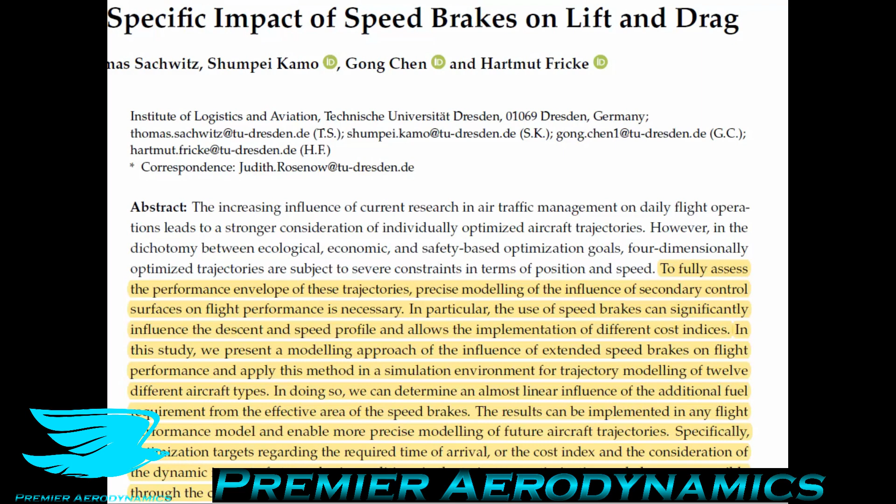So going on, in this study we present a modeling approach of the influence of extended speed brakes on flight performance and apply this method in a simulation environment for trajectory modeling of 12 different aircraft types. In doing so, we can determine an almost linear influence of the additional fuel requirement from the effective area of the speed brakes. So that's pretty cool.

It means that if you know what the area of your speed brake is, you can determine what the amount of fuel that you need is. And then they go on to say the result can be implemented in any flight performance model and enable more precise modeling of future aircraft trajectories.

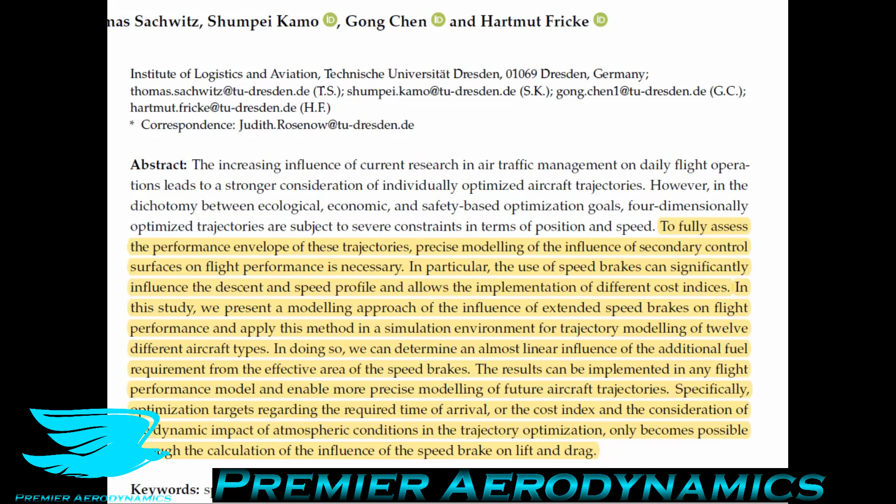Specifically, optimization targets regarding the required time of arrival or the cost index, or the consideration of the dynamic impact of atmospheric conditions in the trajectory optimization, only becomes possible through the calculation of the influence of the speed brake on lift and drag. So this is a very important sentence here, it says a lot.

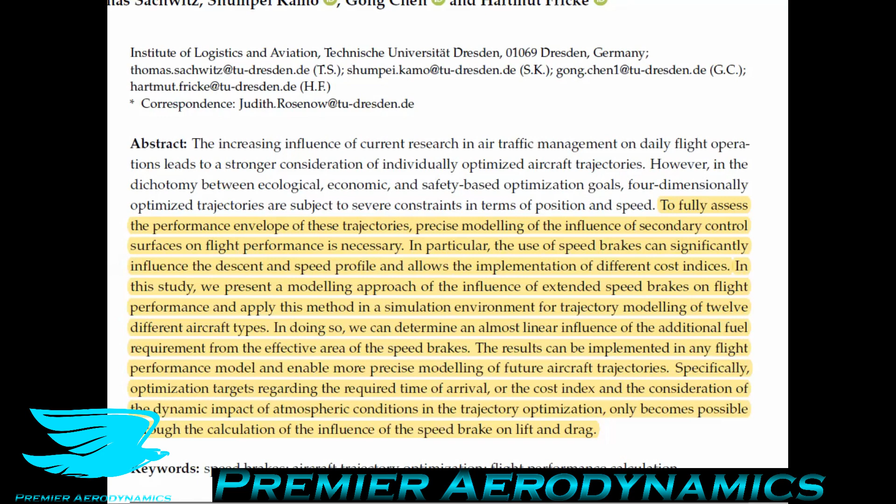What this is saying is you can calculate what the flight profile is based on all these different parameters, but if you don't factor in the speed brakes' effects on lift and drag, then it's not going to be accurate, and it's really not worth much in terms of the actual operation. So that's how much of an effect speed brakes do have on lift and drag of an aircraft and other aerodynamic characteristics, as we'll go into.

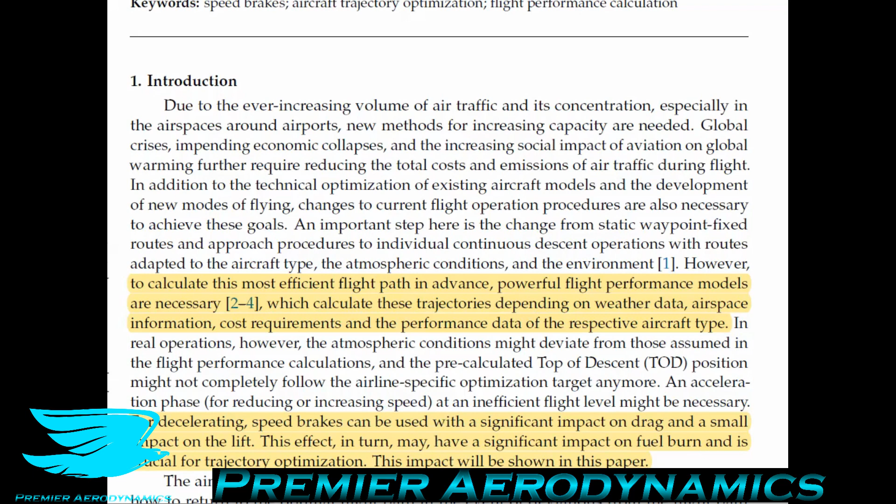So moving on, they say to calculate the most efficient flight path in advance, powerful flight performance models are necessary, which calculate these trajectories depending on weather data, airspace information, cost requirements, and the performance data of the respective aircraft type. So you can't just take off whenever you want to. You need to determine what the weather is, if there are any other planes around, whether you have enough fuel to reach wherever you're going, and the aerodynamic performance of an aircraft.

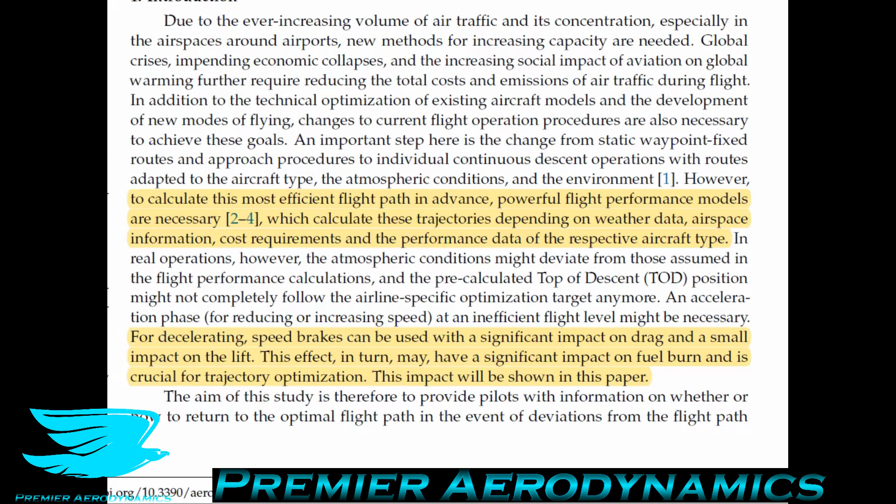So for decelerating, speed brakes can be used with a significant impact on drag and a small impact on lift. This effect, in turn, may have a significant impact on fuel burn and is crucial for trajectory optimization. This impact will be shown in this paper.

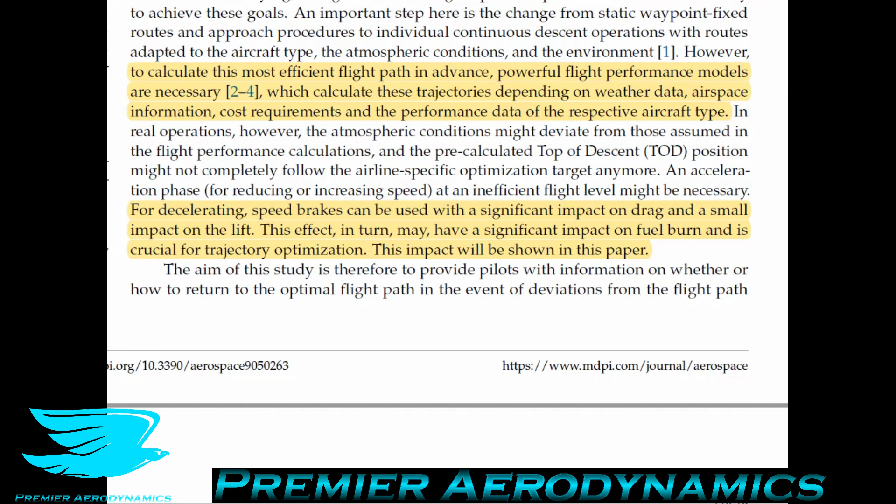So then they go through what we know about speed brakes to date. They say the impact of speed brakes on flight performance, i.e. on lift and drag, depends not only on the aircraft type-specific aerodynamic properties, but also on the speed and altitude of the aircraft. So there's quite a lot that it depends on. The impact of speed brakes is often not in the focus of relevant models, or is approximated by a constant factor of a change in drag of 0.02 and a change in lift of nothing.

This is what I was saying earlier, where if you, before - and this was very common actually before computers came around and before we knew much about aircraft in general - when you were designing an aircraft and let's say you wanted to put a speed brake on there, you would say, okay, well this will affect the drag by this much, in this case 0.02, and it'll affect the lift by nothing.

And this is just a standard that we use, but that's obviously not that accurate. And now that we do have computers and more information, we can get a much more accurate understanding of what the speed brakes do to lift and drag, and that way we can understand we don't need to have as big a safety factor when we're calculating flight envelopes and flight profiles.

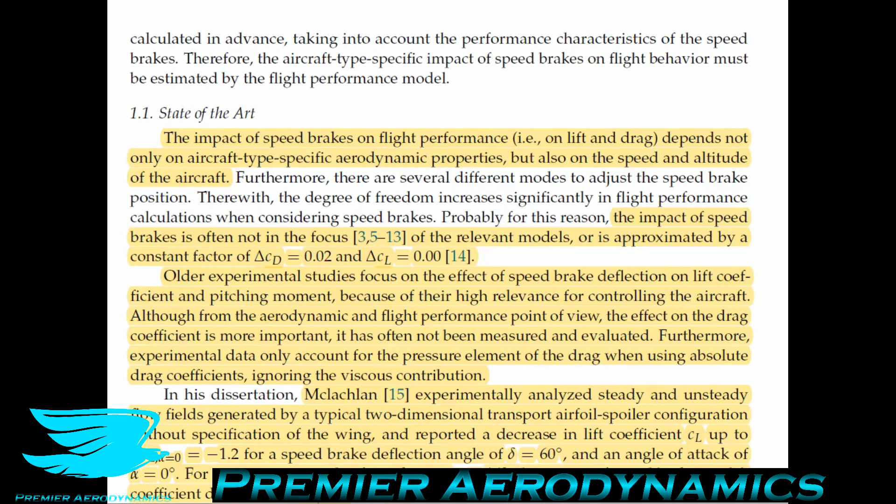So moving on, older experimental studies focus on the effect of speed brake deflection on lift coefficient and pitching moment. So the pitching moment is just, for those of you who don't know, it's whether the nose goes up or down, or the tail goes down or up.

Same thing. Because of the high relevance for controlling the aircraft, the pitching moment is very important for determining the lift. So if you want to increase the lift, you often nose up the aircraft. That then increases the angle of attack for the wings, and then you produce more lift.

Although from the aerodynamic and flight performance point of view, the effect on the drag coefficient is more important. It has often not been measured and evaluated.

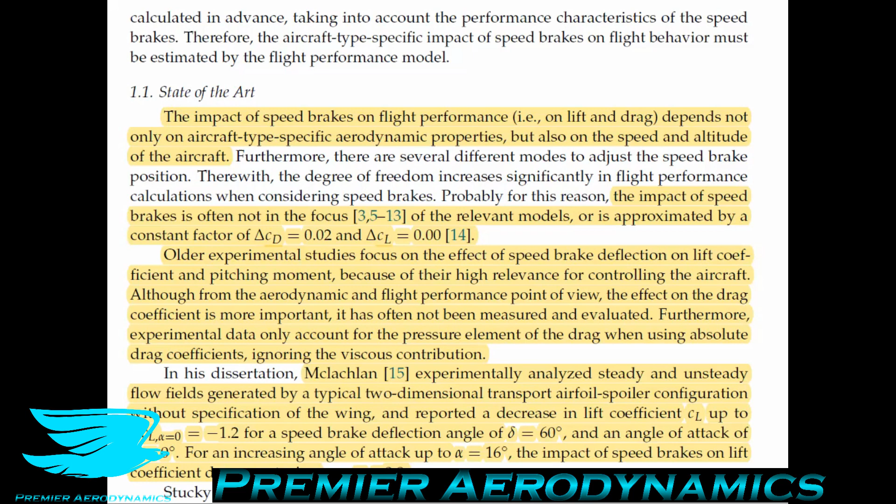Furthermore, experimental data only account for the pressure element of the drag when using absolute drag coefficients, ignoring the viscous contribution. So pressure drag accounts for quite a chunk of an airplane's drag, but viscous drag is actually quite important as well, particularly at low angles of attack. So around the 0-1 degree angle of attack, viscous drag can be 20-30%. And when you go to high angles of attack, then that's when pressure drag becomes far more dominant.

So moving on, Mclachlan experimentally analyzed steady and unsteady flow fields generated by a typical two-dimensional transport airfoil-spoiler configuration without specification of the wing, and reported a decrease in lift coefficient up to -1.2 for a speed brake deflection angle of 60 degrees.

And that's huge. So this was at an angle of attack of 0 degrees. If the speed brake deflection is 60 degrees, so the wing is at 0 but the speed brake has been popped up, you get a lift reduction of 1.2, way more than 0, which was the standard that most people used. And what's more, if you increase angle of attack up to 16 degrees, so the wing now is at 16 degrees, the impact of speed brakes on the lift coefficient decreases to -0.8. So that means that increasing the angle of attack reduces the effect of the speed brakes on the lift coefficient.

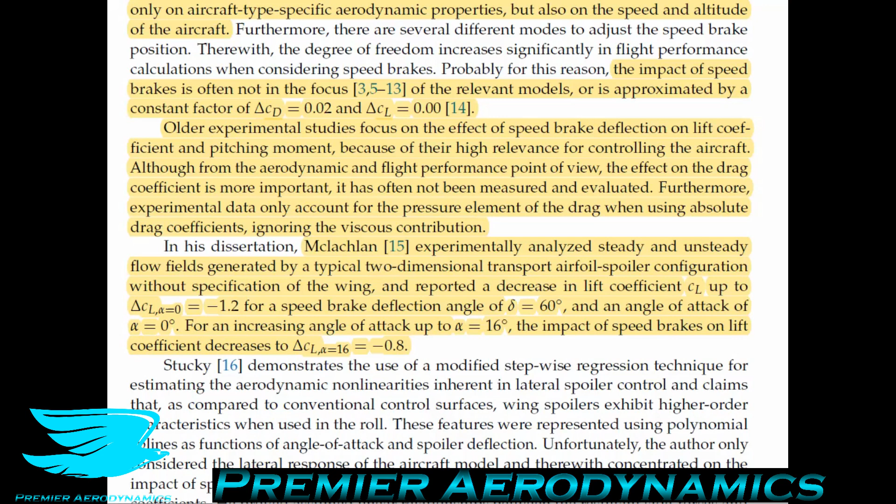Now, Abdelrahman and others experimentally studied the effects of spoiler configurations on the aircraft aerodynamics of a B747 airplane under wind shear conditions, and showed that spoiler deflection enhances the wind shear induced lift loss, especially at low angles of attack. They published experimentally gained values.

So for an angle of attack of 16 degrees and a deflection of 90 degrees on the speed brake, the lift coefficient increases by 1.25, corresponding to minus 70% of the lift at 16 degrees and a deflection of 0. And then if you have an angle of attack of 4 degrees and the deflection angle of 90 degrees, the change in the lift coefficient is 0.6. So it does change a lot.

Wind shear tends to amplify the spoiler effect on the side force and yawing moment, but only at a high angle of attack does it alter the resulting rolling moment. This shows the variability of these speed brakes depending on the orientation of the aircraft to begin with. Furthermore, Abdelrahman and colleagues proved that speed brake deflections have almost no influence on the aircraft stability margin.

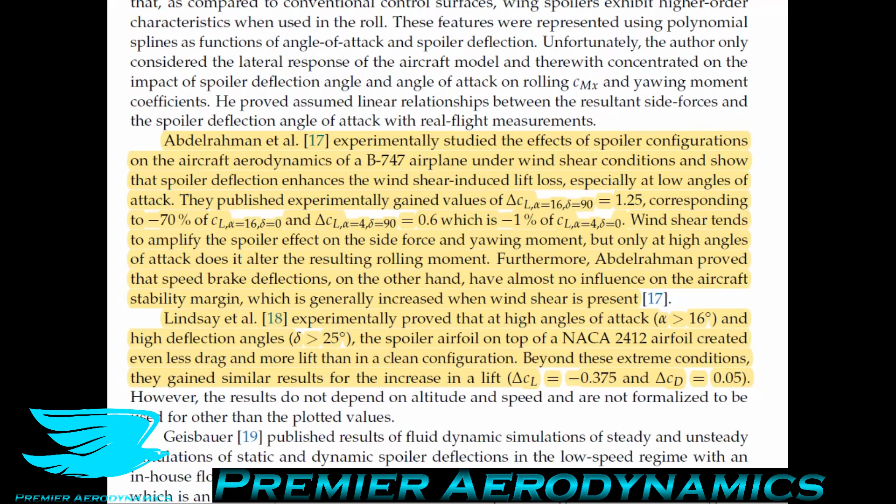Lindsay and colleagues experimentally proved that at high angles of attack, above 16 degrees, and high deflection angles above 25 degrees, the spoiler airfoil on top of a NACA 2412 airfoil created even less drag and more lift than in a clean configuration. So using a spoiler on this particular airfoil is actually better performance, you get less drag and more lift.

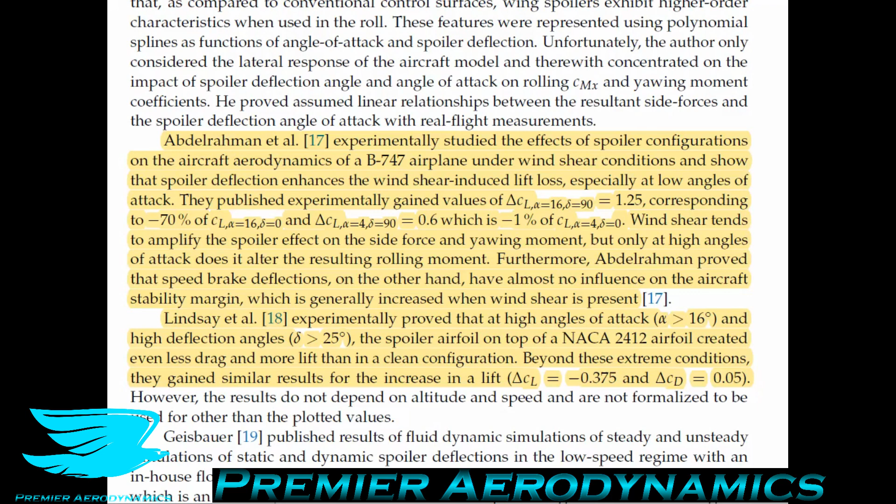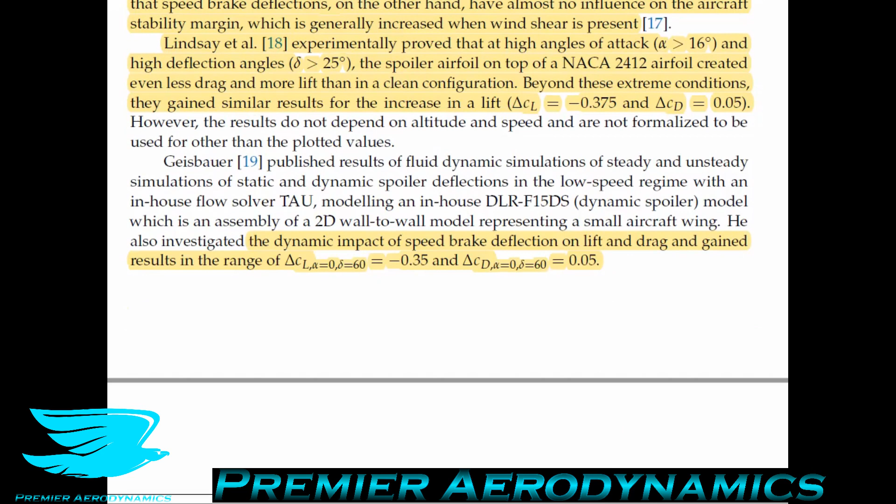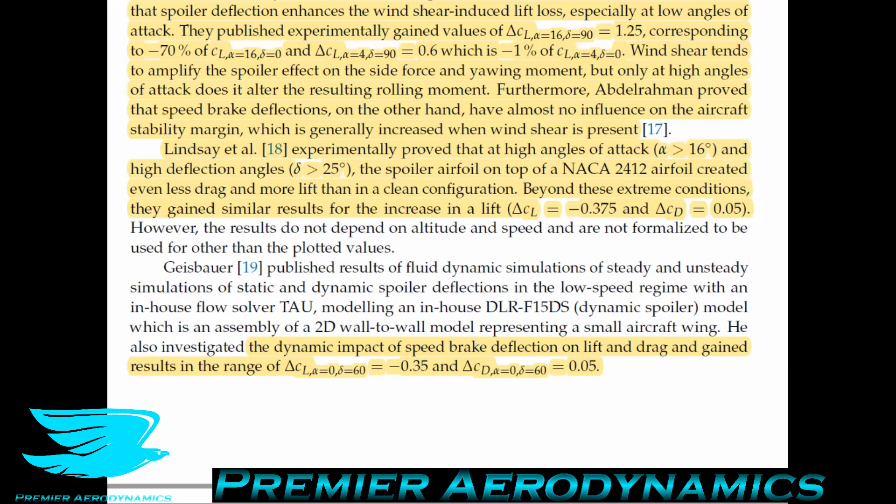Beyond these extreme conditions, they gain similar results for the increase in lift. The lift reduced by 0.375 and the drag increased by 0.05. The dynamic impact of speed brake deflection on lift and drag, in the range of a 0-degree angle of attack and deflection of 60 degrees, is fairly large, and again shows that speed brakes do affect the lift and drag of an aircraft a lot.

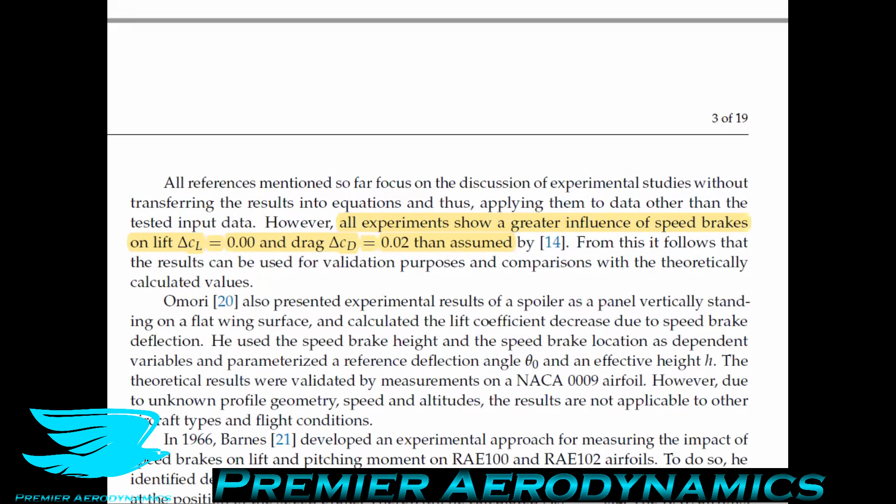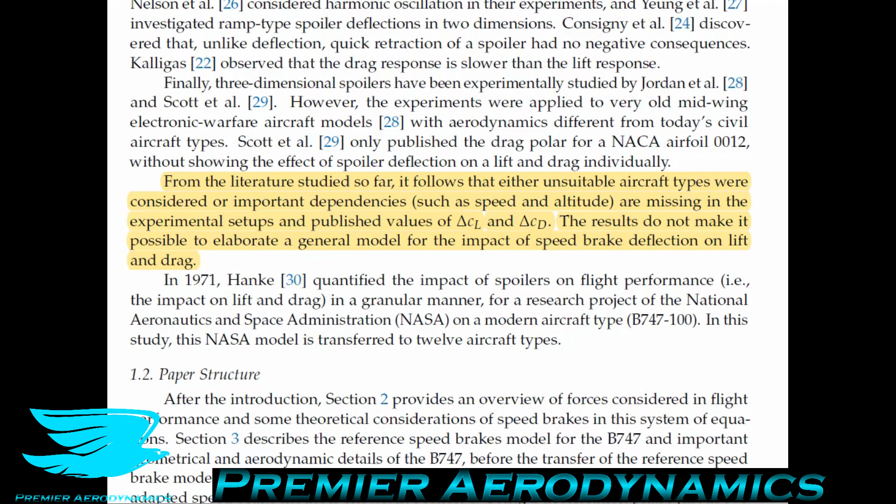All experiments show a greater influence of speed brakes on the lift coefficient and drag coefficient than assumed, 0 and 0.02 respectively, which is why they're doing this research. From the literature studied so far, it follows that either unsuitable aircraft types were considered, or important dependencies such as speed and altitude are missing in experimental setups and published values of the change in lift and drag coefficients. The results do not make it possible to elaborate a general model for the impact of speed brake deflection on lift and drag, and more research is needed.

They then go into their research and say that by using the speed brakes, steeper flight profiles can be flown without exceeding the speed limits of the aircraft type or the airspace currently being flown in. So let's talk about this. What does this mean? When you use speed brakes, why would you be able to have steeper flight profiles?

In a typical flight profile of an aircraft, let's break it down to very basic components. You have the takeoff and climb, then the cruise, then the descent and landing. The descent and landing takes a certain amount of distance to do. So when you're, let's say, 200 kilometers out from a city, you then start descending, and this is because of how quickly you can descend.

If you can use a speed brake, you can actually wait longer. Let's say you're only 150 kilometers out from the city instead of 200 before you start descending. That means you can travel faster, you can go through cruise for a longer distance, which means you get to the city quicker. That's why you can have a steeper flight profile, because you can descend quicker. That also means you don't have to travel as fast to get to your destination. You can travel slower, or the same speed, get there quicker, and ferry people back and forth between two destinations even quicker.

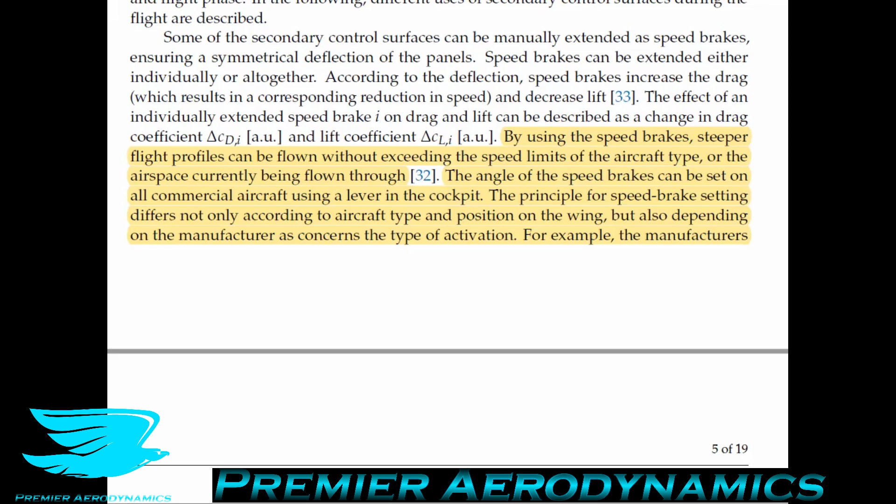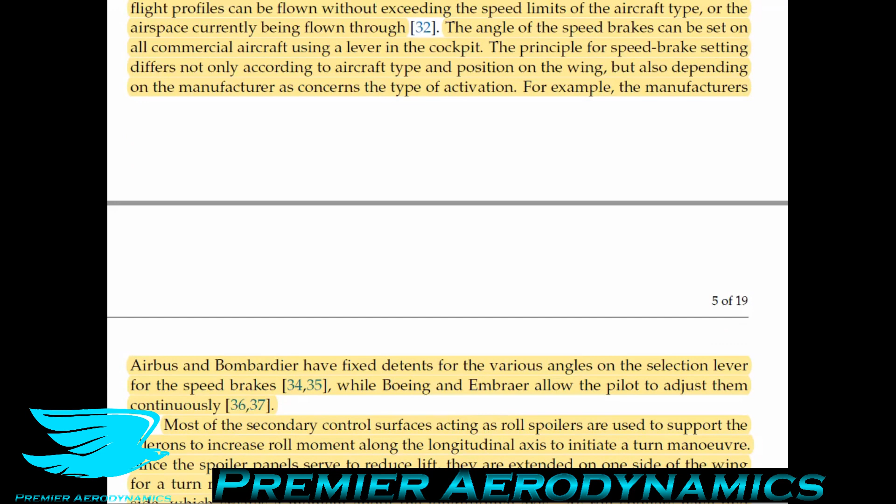The angle of the speed brakes can be set on all commercial aircraft using a lever in the cockpit. The principle for speed brake setting differs not only according to the aircraft type and position of the wing, but also depends on the manufacturer as concerns the type of activation. For example, the manufacturers of Airbus and Bombardier have fixed detents for the various angles of the selection lever of the speed brakes, while Boeing and Embraer allow the pilot to adjust them continuously.

Most of the secondary control surfaces act as rolling spoilers, used to support the ailerons to increase rolling moment along the longitudinal axis to initiate a turn maneuver. So let's talk about this. On an aircraft, you have a whole bunch of control surfaces: wing flaps, ailerons, and then these different types of air brakes, these speed brakes.

Ailerons are typically used further outboard on the wing, near the wing tips. The reason you put them so far out is because the further out you put them, the greater the moment arm is. You're rolling about the longitudinal axis, the middle of the aircraft, so if you go further out, that distance increases, which means you don't need as great a force to roll the aircraft, meaning you can get away with smaller control surfaces.

Now, using air brakes or these speed brakes, you can also use them to help roll. If you pop them up, that changes the lift on the wing, and then you can use them to also roll. So they help support this aileron function.

Since the spoiler panels serve to reduce lift, they are extended on one side of the wing for a turn maneuver. If you reduce the lift, that means the other side of the aircraft is producing more lift, and that's going to result in this imbalance in force, which results in a roll. The resulting asymmetric lift causes the wing to sink on one side, which creates a moment about the longitudinal axis.

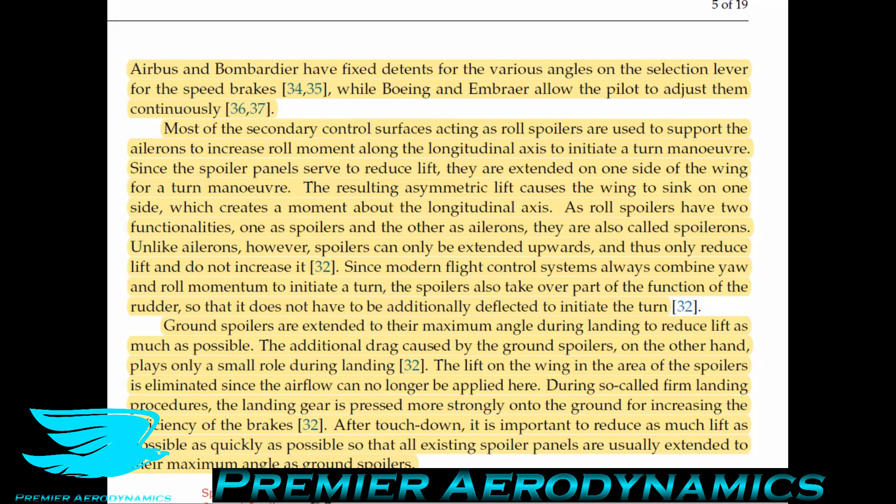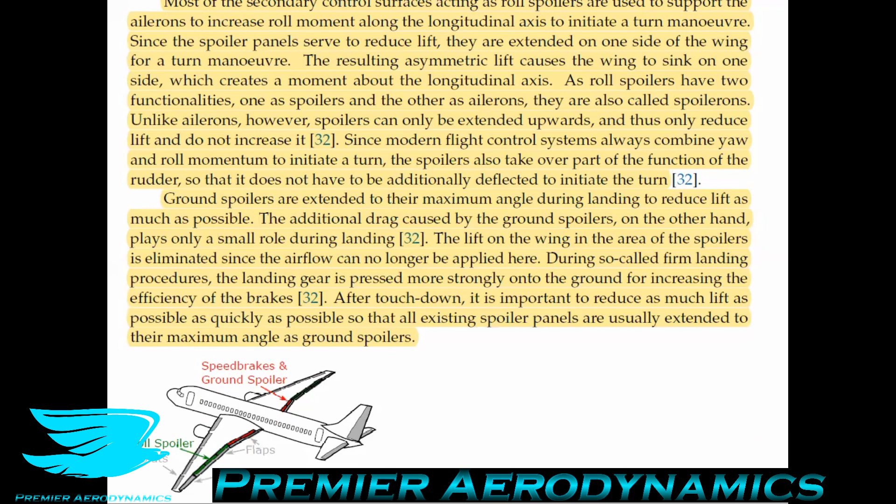On commercial aircraft, that's often not the case - you want them to be far more stable. So ground spoilers are different types of spoilers now. They're still on the wing, but have different functions. These ground spoilers are extended to their maximum angle during landing to reduce lift as much as possible. The additional drag caused by the ground spoilers, on the other hand, plays only a small role during landing.

This is very interesting because you typically assume when you see this massive air brake come up that this is increasing the drag, and that's the primary function - but the primary function is actually to reduce lift as much as possible. The reason why, as they explain, is that the lift on the wing in the area of the spoilers is eliminated since the airflow can no longer be applied.

During so-called firm landing procedures, the landing gear is pressed more strongly onto the ground to increase the efficiency of the brakes. This means that by dropping the lift so much, you can then rely on the brakes to arrest the aircraft instead of using aerodynamic drag. So this is one way of bringing the aircraft to a stop.

After touchdown, it is important to reduce as much lift as possible as quickly as possible, so all existing spoiler panels are usually extended to the maximum angle as ground spoilers.

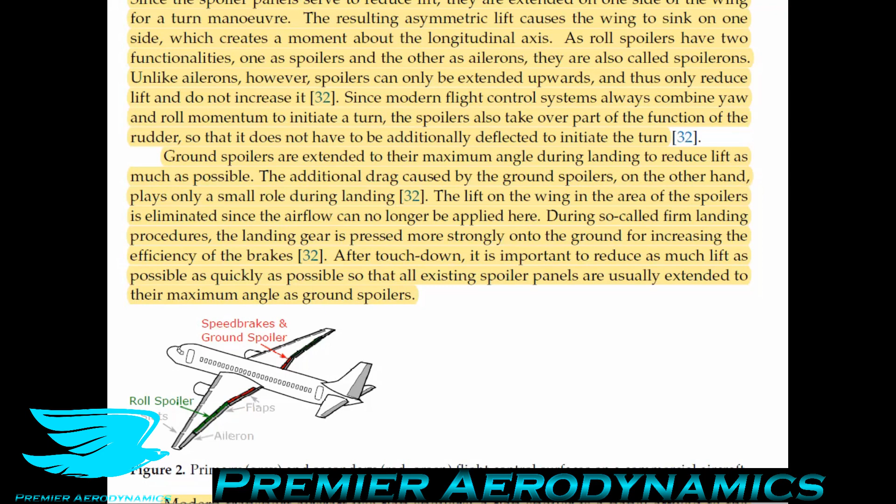Why is it important to come to a halt as quickly as possible? One main reason is that you only have so long a runway, and the bigger the aircraft, typically the longer the runway you need, both for takeoff and landing. What's more, if you have a runway, you often have other aircraft on there as well, so you don't want to take up all this space, because that means other aircraft cannot use it. The less space you use to land and take off, the more airplanes can land and take off, meaning the space is used far more efficiently, which reduces costs.

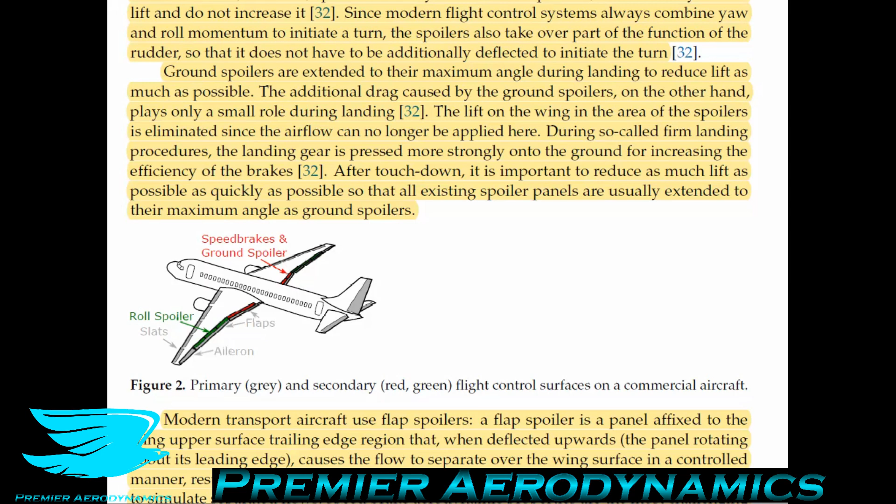And it also means you can fly more aircraft and get people where they want to go much quicker. So modern transport aircraft use flap spoilers. A flap spoiler is a panel fixed to the wing upper surface trailing edge region that, when deflected upwards, the panel rotating about its leading edge causes the flow to separate over the wing surface in a controlled manner, resulting in a decrease in lift and an increase in drag. This is very important to be able to do in a controlled manner.

Due to the current inability to simulate separated flows, speed brake aerodynamic properties are the most challenging of the airplane control surfaces to anticipate. Speed brakes have characteristics that make them ideal for lateral control in aircraft. Large rolling moments are produced by speed brakes, and they're an alternative to ailerons for full roll control, allowing full span flaps to be used, with apparent STOL uses and benefits. STOL is short takeoff and landing.

As mentioned earlier, having these air brakes, speed brakes, or spoilers, whatever you want to call them, they can help with roll, meaning they can take over much of the work that the ailerons do. So you're having these multi-purposes because they also serve this STOL uses and benefits.

Ailerons provide an undesirable yawing moment, whereas speed brakes produce a favorable yawing moment. Again, this is the inertial coupling I was talking about earlier - when you change the roll, the yaw also gets affected. In the case of ailerons, this is undesirable in the way they do it, but with speed brakes, it's favorable.

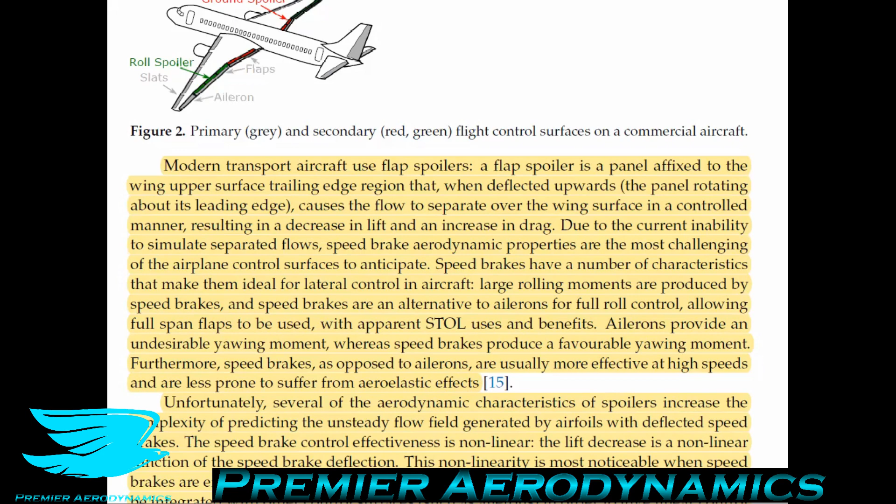It can actually disintegrate the wings, and it has happened. It's a nightmare for most pilots and aircraft designers because aeroelastic effects are usually the hardest aspects of the aerodynamics to get right. If you get them wrong, you can have this flutter, which produces problems during the testing phase and can cause casualties, which is why it's so important to get right. So speed brakes are very beneficial for damping these effects out, whereas ailerons are not as good.

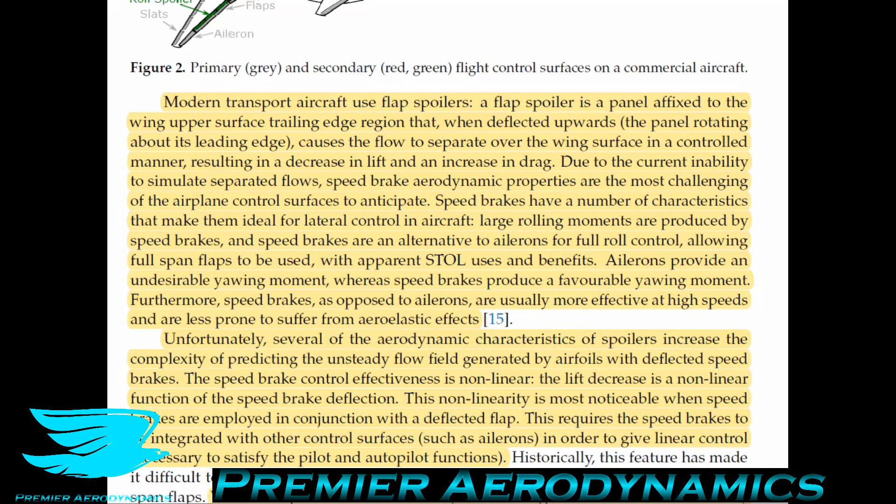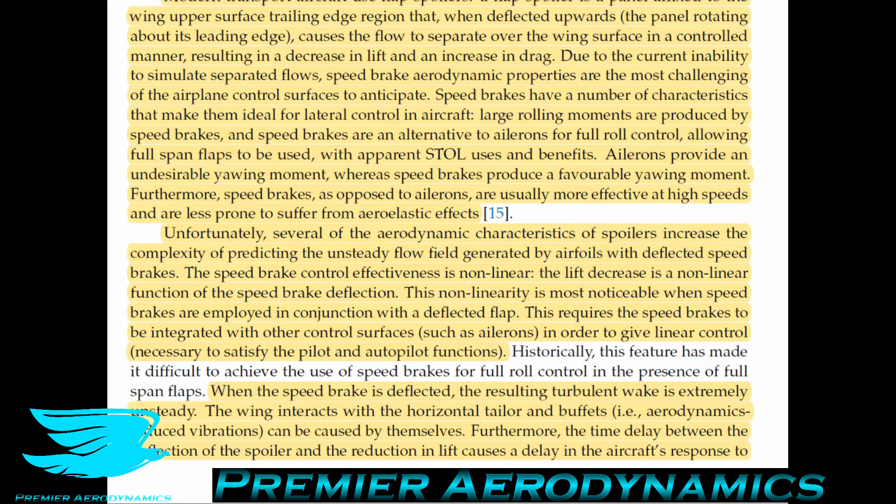Unfortunately, several of the aerodynamic characteristics of spoilers increase the complexity of predicting the unsteady flow field generated by airfoils with deflected speed brakes. The speed brake control effectiveness is nonlinear - the lift decrease is a nonlinear function of speed brake deflection. This nonlinearity is most noticeable when speed brakes are employed in conjunction with a deflected flap. This requires the speed brakes to be integrated with other control surfaces such as ailerons in order to give linear control, necessary to satisfy the pilot and autopilot functions.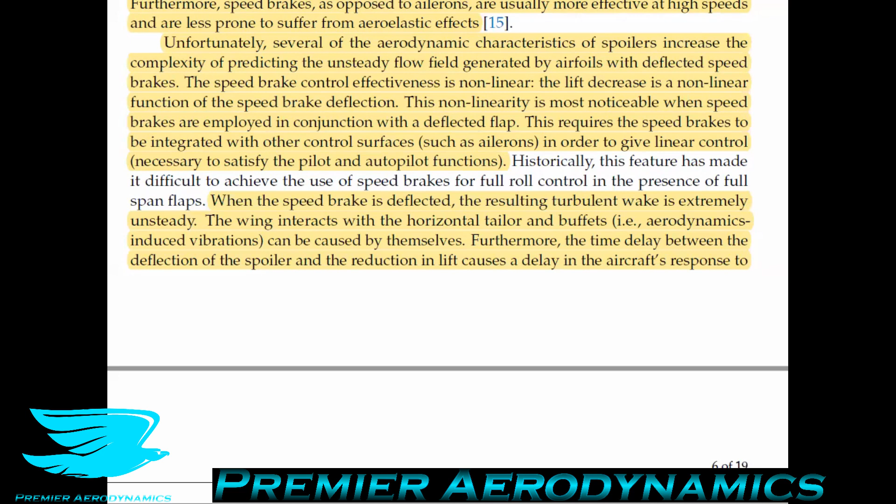When the speed brake is deflected, the resulting turbulent wake is extremely unsteady. The wing interacts with the horizontal tail and buffets - again, this is potentially some sort of flutter.

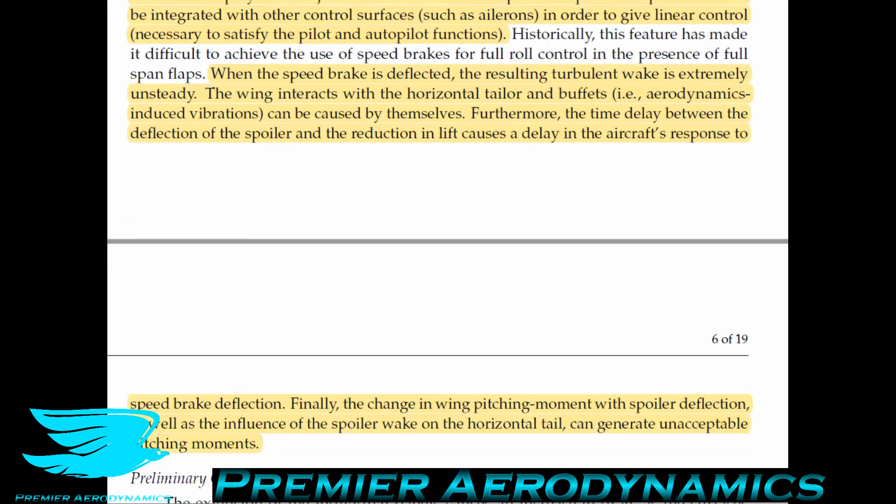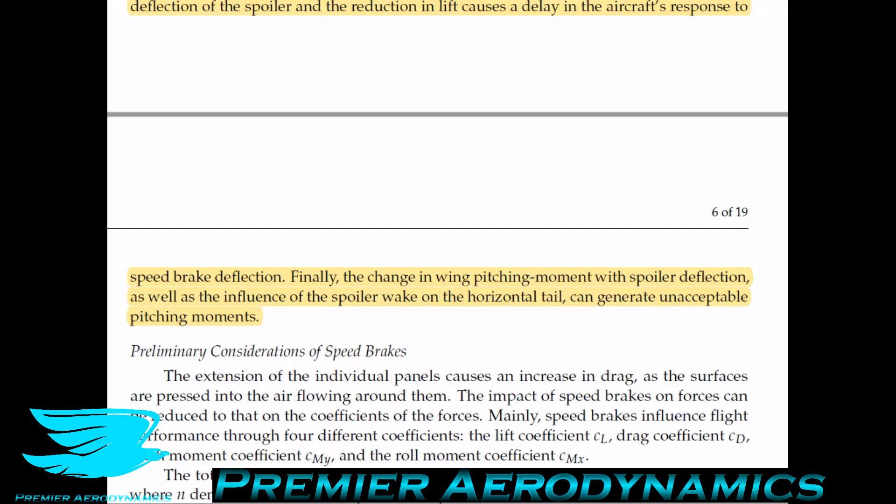Furthermore, the time delay between the deflection of the spoiler and the reduction in lift causes a delay in the aircraft's response to speed brake deflection. Finally, the change in wing pitching moment with spoiler deflection, as well as the influence of the spoiler wake on the horizontal tail, can generate unacceptable pitching moments.

So those are just some negative effects of speed brakes. Now they go into testing these speed brakes on different aircraft. For example, in this one, they're looking at speed brakes on the NASA model B747.

The B747 consists of 6 speed brakes per wing. That's a lot. These 6 speed brakes per wing are extended synchronously, whereby the inner speed brakes can only be extended by 20 degrees compared to the outer speed brakes with a maximum angle of 45 degrees. So this means the outer speed brakes can be deflected far more.

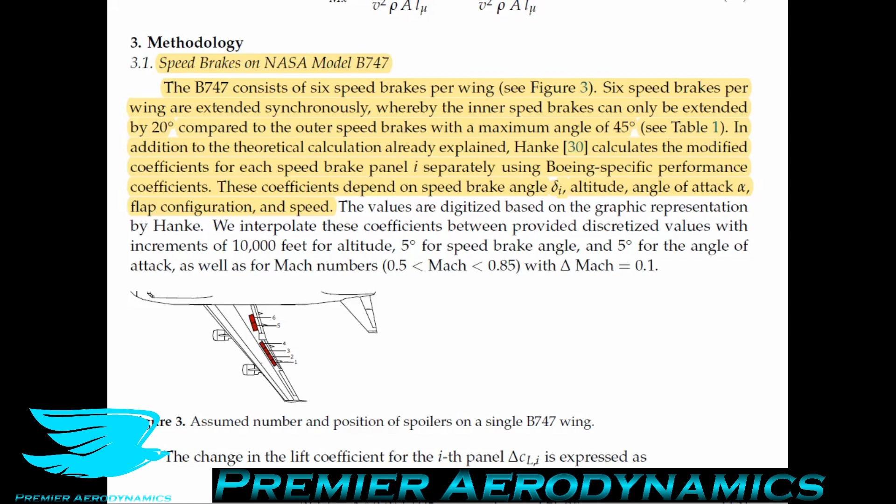In addition to the theoretical calculation explained, Hanke, another author, calculates the modified coefficients for each speed brake panel separately, using Boeing-specific performance coefficients. These coefficients depend on speed brake angle, altitude, angle of attack, flap configuration, and speed. And now they just go through these equations that they're deriving to use speed brakes.

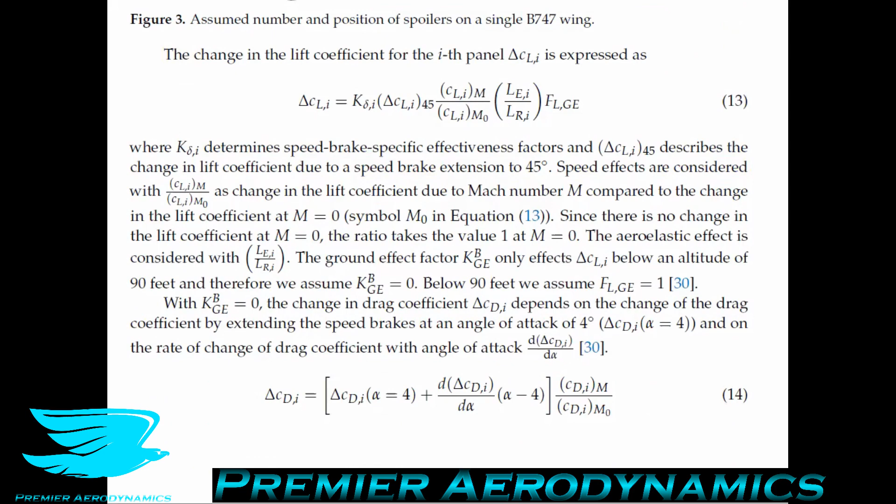I'm not going to go through them because they're quite boring just to read aloud. If you're interested in them, you can look at this paper. It's open access again, so you can access it very easily and go through them if you're interested.

Let's move on to some of the results. So they say it can be concluded that when comparing different speed brake panels, the wing depth at this point has little effect on the speed brake impact, and the variation of the speed brake angle is more relevant.

So one thing I want to talk about is the wing depth. I am not too familiar with this term. I looked it up, and there's no clear definition of this term, but from what I can ascertain, it's how far down from the leading edge the speed brakes are installed.

And what they're saying is that this distance doesn't really affect the speed brake's performance very much. The far more relevant parameter is the angle that it's deployed at. So that's interesting. It shows that the aircraft is fairly insensitive to how far down these spoilers are placed.

Note that this fact is only valid for laminar flows adjacent to the profile in a subsonic range, a constant angle of attack, and a clean flap configuration. So these three parameters or considerations are quite important.

So subsonic range, that's fine—most aircraft travel in subsonic range anyway. Constant angle of attack, that's pretty good, though sometimes there is a change of angle of attack, so that's sometimes not the case.

And a clean flap configuration—so this is again kind of in the cruise condition. Furthermore, maximum speed must be well below the speed of sound, so below Mach 0.94. That's not too bad—most aircraft travel below that.

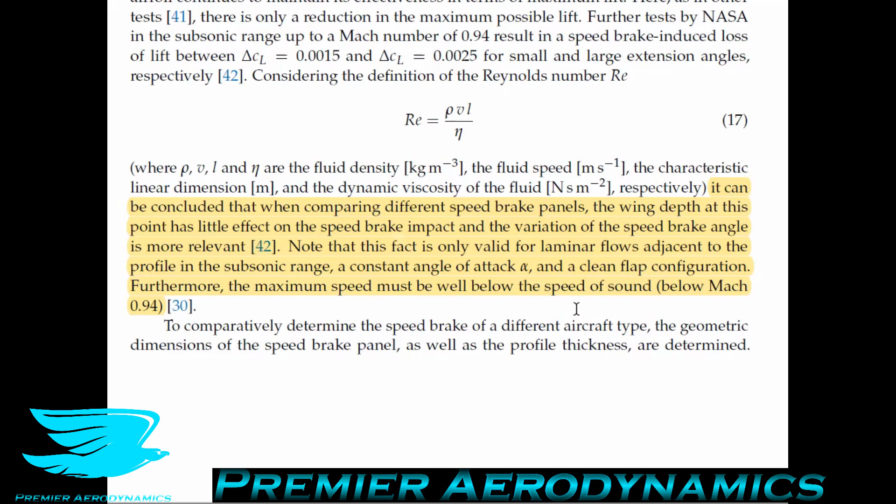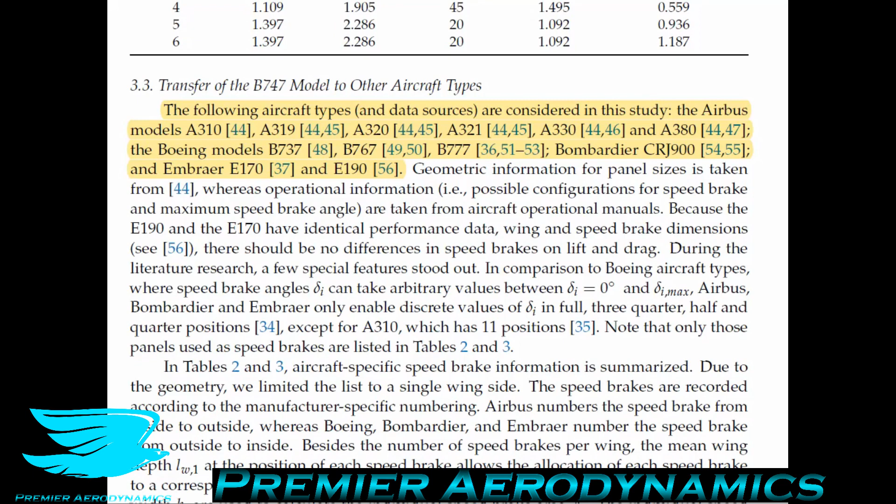Now, they not only looked at that B747, they looked at 12 other aircraft. So they looked at Airbus ones: A310, A319, A320, A321, A330, A380—the big one. Then they had Boeing models 737, 767, 777, then the Bombardier CRJ 900, and the Embraer E170 and E190. So a whole bunch of different ones, from very small passenger aircraft to very large passenger aircraft.

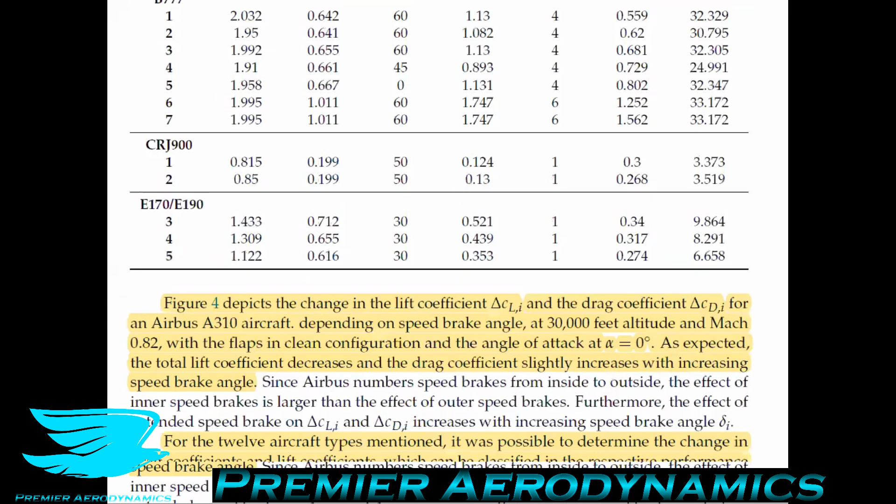And they looked at how their models affected these flight profiles. So they say figure 4 in the paper depicts the change in the lift coefficient and the drag coefficient for an Airbus A310.

Depending on the speed brake angle at 30,000 foot altitude and a Mach number of 0.82, with the flaps in clean configuration and an angle of attack at 0 degrees, as expected, the total lift coefficient decreases and the drag coefficient slightly increases with increasing speed brake angle. So that's pretty good—that's what they're supposed to do to some extent.

For the 12 aircraft types mentioned, it was possible to determine the change in the drag coefficient and lift coefficient, which can be classified in a respective performance field of the aircraft types and thus allow good comparison possibilities of the individual types. So this is a big step forward, because before this, remember how I was saying that when you were designing an aircraft, you just say, okay, the speed brakes change the lift and drag by this much across the board.

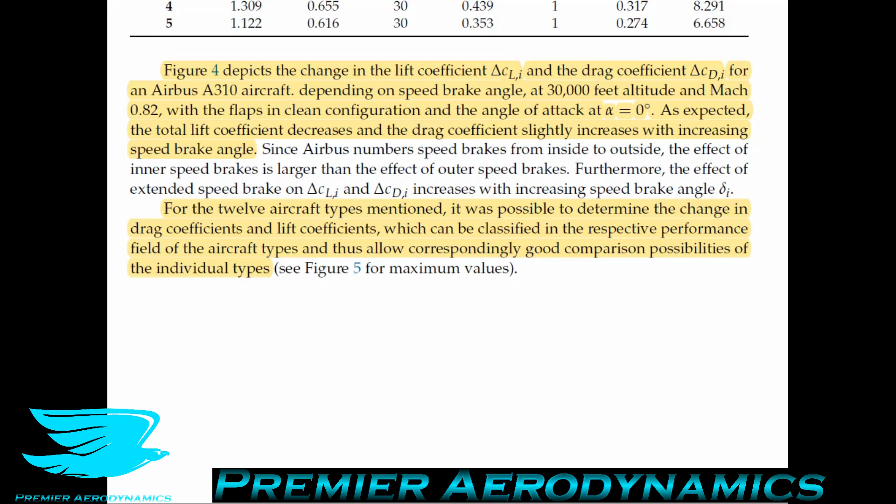It doesn't matter what aircraft you're looking at, that's what it's doing. Now they're looking at each individual aircraft and finding that they do change slightly between different aircraft, and now we've got a pretty good model for that. So we don't just have to assume that the speed brakes are doing the exact same thing for each aircraft. We know that they're not, and we know how they are changing.

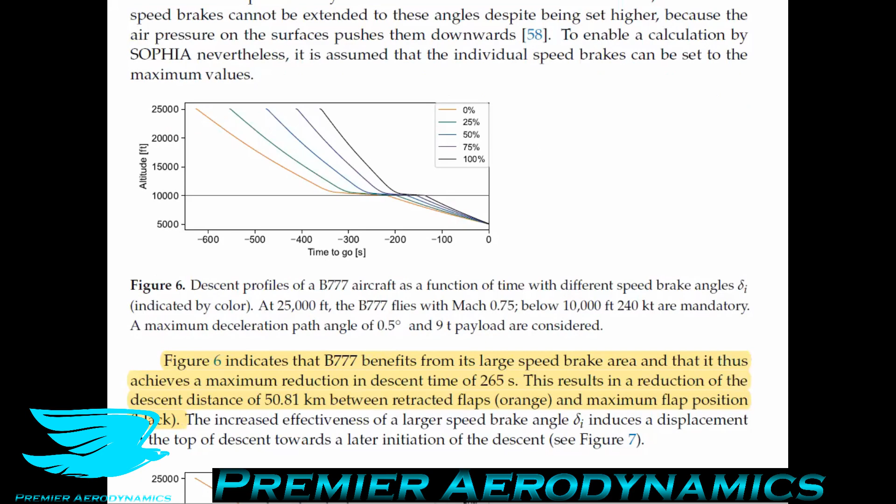So now they look at the benefits and detriments for the flight profile on a B777. They say, from its large speed brake area, it achieves a maximum reduction in descent time of 265 seconds, so that's 4 minutes. That's pretty good. This results in a reduction of the descent distance by 51 kilometers between retracted flaps and maximum flap position. That's pretty massive.

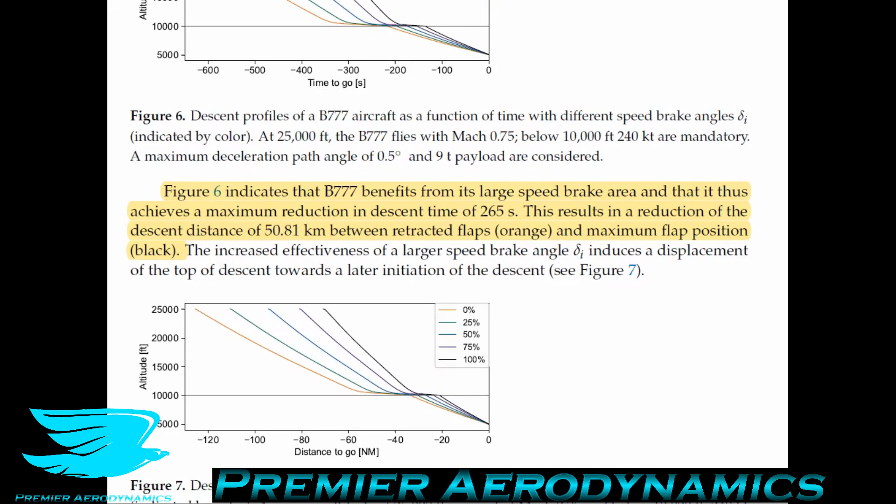That means you can travel an extra 51 kilometers in the cruise configuration before you have to descend. So that means you can go faster and get to your destination quicker.

To determine the possible impact of speed brakes on fuel consumption - now this is interesting. We've been talking about how the lift and drag coefficients get affected and the flight profiles. We often assume that if there's a general positive effect for the lift and drag, the fuel consumption is going to be positively affected as well. But they're going to go into this now.

So they say, to determine the effects of speed brakes on fuel consumption, flights from Dresden, Germany starting at a cruise altitude of 25,000 feet are examined.

By shortening the descent section, the aircraft remains at cruise for longer and thus flies with the thrust setting for cruising flight for longer, which is above the idle setting during descent. This means they're in significantly more powered flight for longer on this trip than if you didn't have these speed brakes deflected, because during descent you just put your engines on idle instead of really giving it the beans.

As a result, the total amount of fuel required for the flight increases. It follows that the use of the speed brakes leads to a lengthening of the cruise segment, and this in turn leads to a larger amount of fuel required for the entire flight. At the same time, however, a shortening of the descent time becomes possible.

The time savings are very small compared to the total flight duration. The reason for this is the steep angles that can be flown using the speed brakes, especially in long-haul models. The problem with long-haul models is that the descent takes up a very short amount of time compared to the entire cruise.

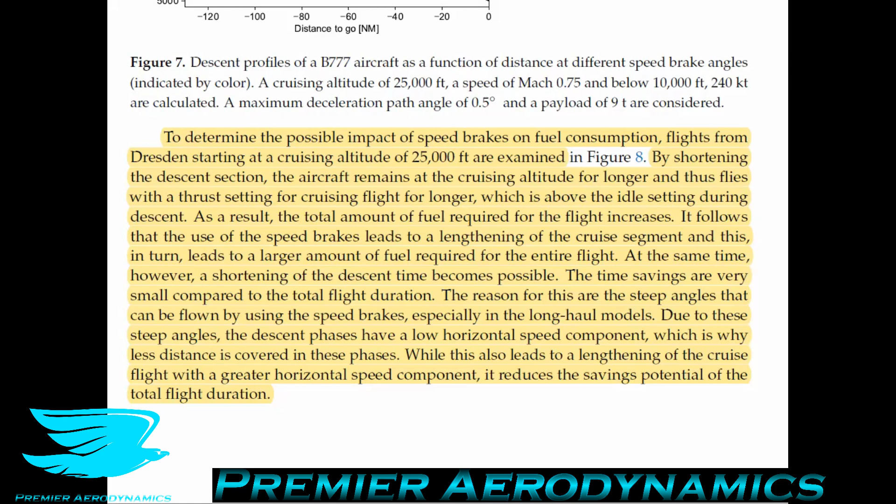Due to the steep angles, the descent phases have a low horizontal speed component, which is why less distance is covered in these phases. While this also leads to a lengthening of the cruise flight with a greater horizontal speed component, it reduces the savings potential of the total flight duration.

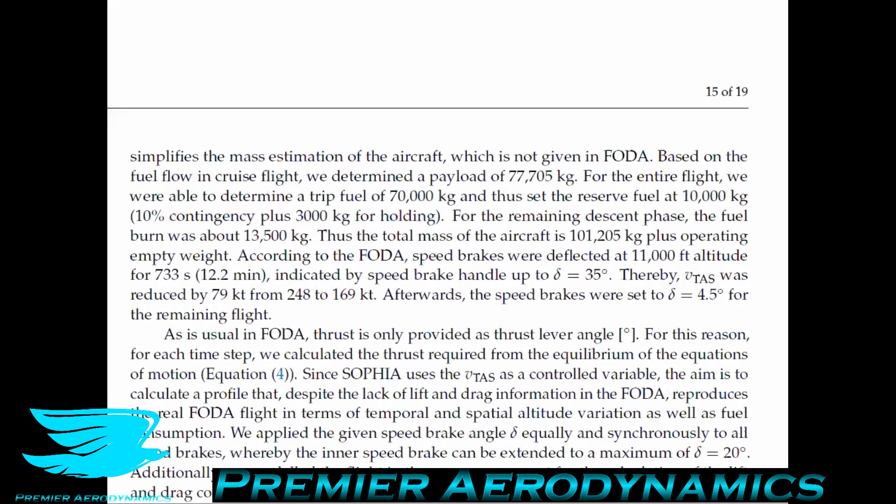So that's how speed brakes affect an airplane's performance. They change the lift and drag, usually positively in terms of descent time, but negatively in terms of fuel consumption.